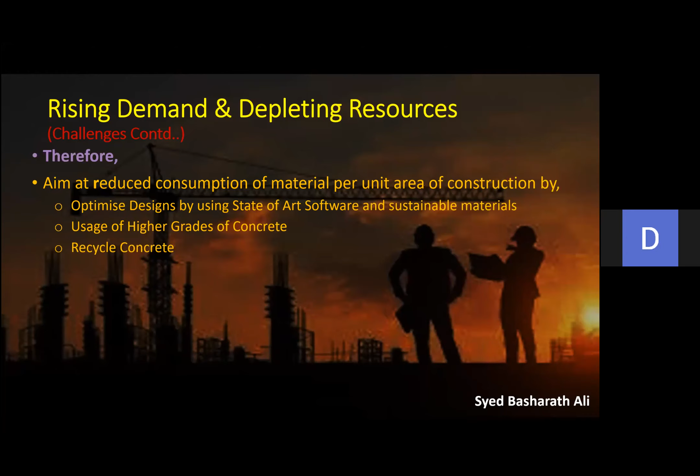Excuse me, sir. Hello? Sir, sorry to interrupt, sir. Actually, the slides are not changing, sir. Just to inform. Just hold on. Okay, I'm seeing them changing here. Just hold on. You can see me? Yes, sir. But the slides are not changing, sir. Okay, just hold on. Do you see now? Yes, sir. You see it now? Yes, sir. Yeah.

Yeah, we were discussing this. Aim at reduced consumption of material per unit area of construction. For that, the designs have to be optimized by using state-of-the-art software, good judgment and sustainable materials. Then usage of higher grades of concrete would result in lesser concrete, because as I said, from M15 we have moved to M30 now, minimum M25, M30, and I'm pretty sure very soon we'll see that even M25 and M30 will be obsolete.

Then the recycling of material, that's still not happening in India. We should, because we are seeing redevelopment happening. Old concrete buildings are being brought down, and old roads are being removed. Whenever we demolish any concrete, we tend to throw it away as debris. I think it's time that the government come up with a clear policy and enforce it, so that the concrete is recycled, the debris is sent to those plants, and they regenerate coarse and fine aggregates from that.

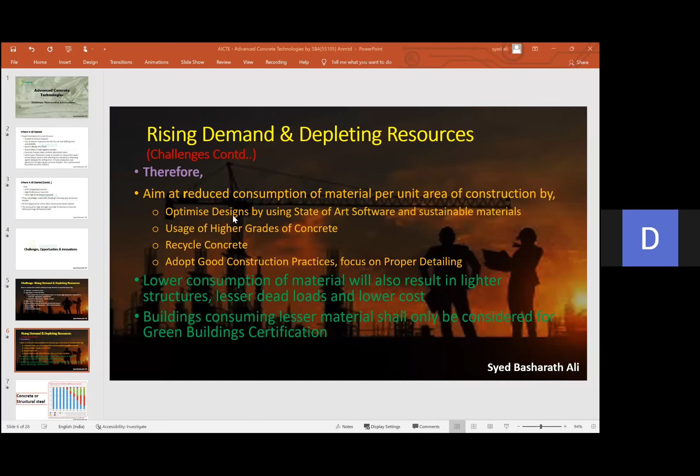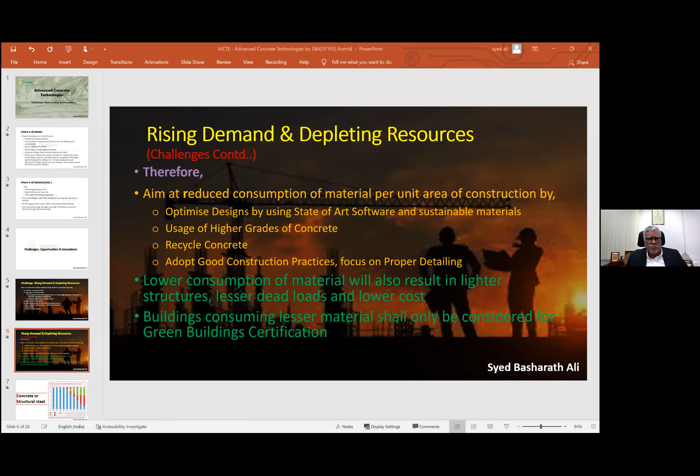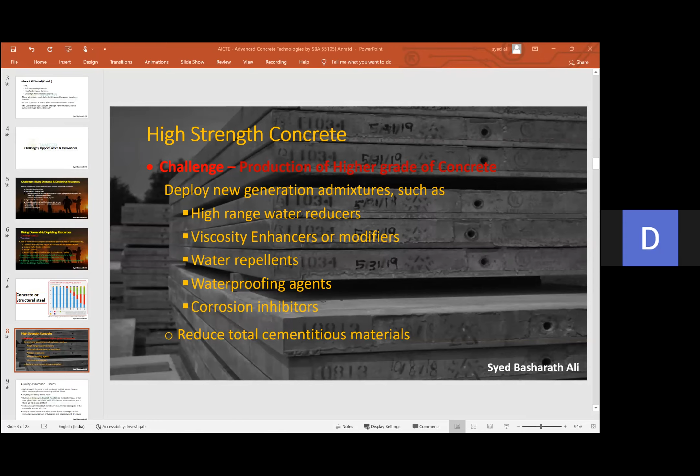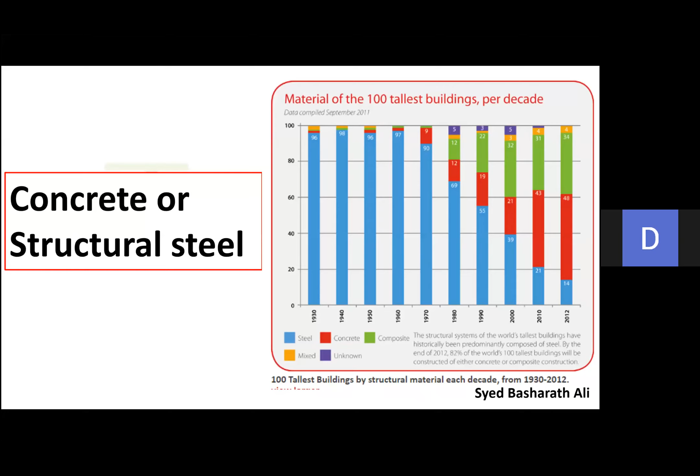You see this slide now? No, sir. Slide has not changed, sir. Again, some issue with the system. Sir will join shortly. Kindly wait. Is it okay now? Yes, sir. We are able to see the screen. Sir, can you move backward or forward? We will tell whether the slide is changing or not. Okay. Is it changing now? No, sir. It is at high strength concrete only. It's not changing again. Is it changing now? Yes, sir. Now it's changing, sir. Okay.

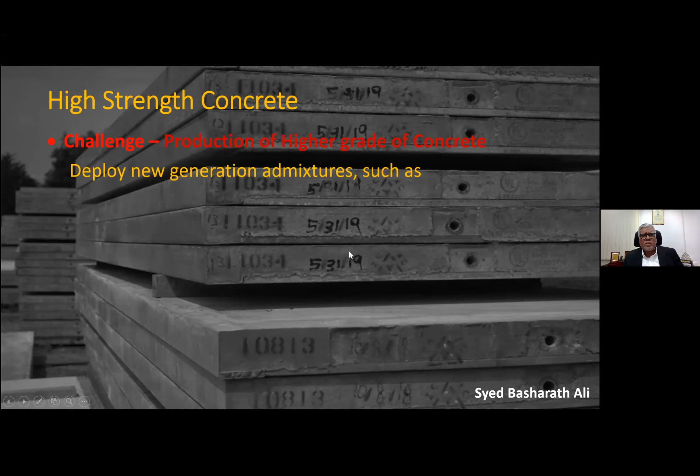So we'll discuss the challenge of production of high grade concrete. To do that, we started deploying new generation admixtures, such as high range water reducers, viscosity enhancers or modifiers, because the water cementitious ratio, we know, is the biggest factor in attaining higher strength.

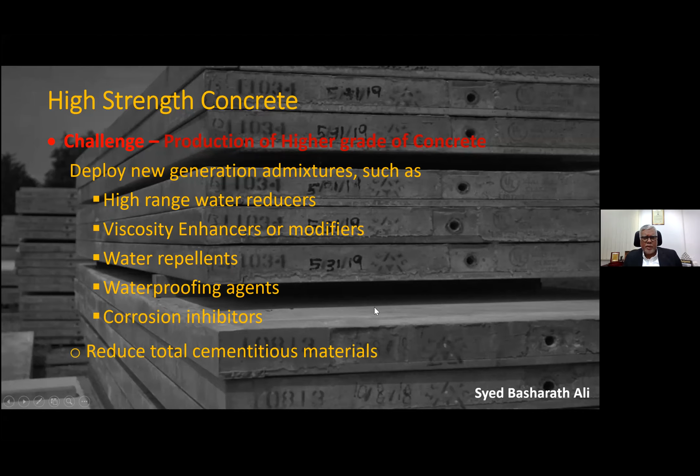Then viscosity enhancers to control the workability of concrete, then water repellents, waterproofing agents, and corrosion inhibitors. We started using these, which resulted in production of higher strength concrete. And we were able to do that even with reduced cementitious materials.

Is it changing now? Yes, sir. Yes, sir. Hello.

Now let's discuss the quality assurance issues which we are facing on a daily basis even now. I'm telling you this from the experience of not only me but most practitioners in the field. High strength concrete is only produced by RMC plants. However, there is no entry barrier on setting up RMC plants. Today, anybody can set up an RMC plant.

Everybody cannot start a diagnostic center. Everybody cannot start a medical shop. You need to be a pharmacist, or have a degree in pharmacy to start a medical shop, or a degree to start a diagnostic center. But anybody can go and start an RMC plant. Somebody who was just supplying sand, you hear that he started manufacturing concrete without any technical competence or capabilities. There are no controls as such.

So anybody can set up an RMC plant, however the RMCMA, that is the Ready Mix Concrete Manufacturers Association, is the only body which monitors the performance of the RMC plants of its members. They are fairly strict. That's why very few RMC vendors are their members, mostly the larger ones. The smaller ones still don't do that.

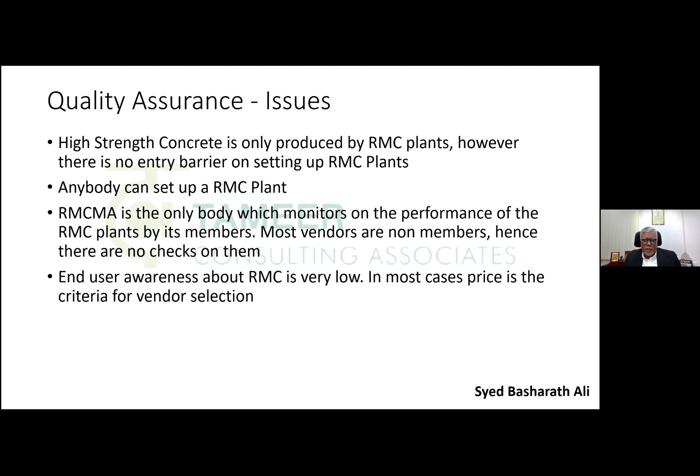End user awareness about RMC is also very low. The end user thinks that, as he buys any product from the market, concrete is the same thing. So in most cases, the price is the criteria. He will buy RMC from somebody who gives it very cheap, be it any grade of concrete, 25, 30, 35, 40, whatever it is. Even though there are designers who would specify, you can't be sure about the end user.

He would not look at the credibility of the vendor, and because they are attracted by the lower price offered by some of the vendors, they go and buy that. And nobody would do business by losing money. So they end up definitely cutting cement or whatever admixtures they were supposed to mix as per the design mix. That is one big challenge for which there is still no solution before us.

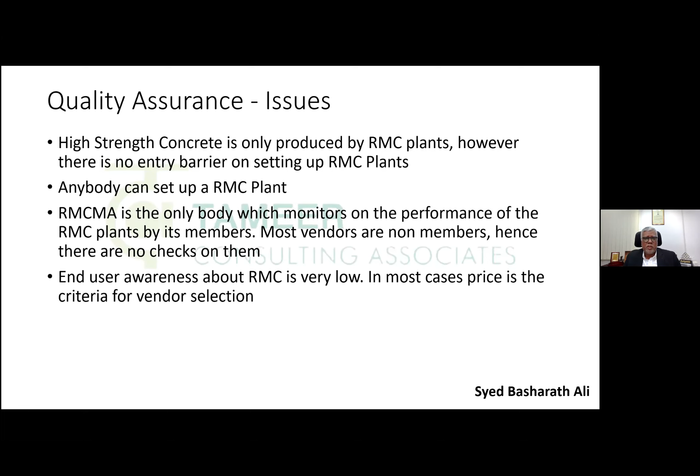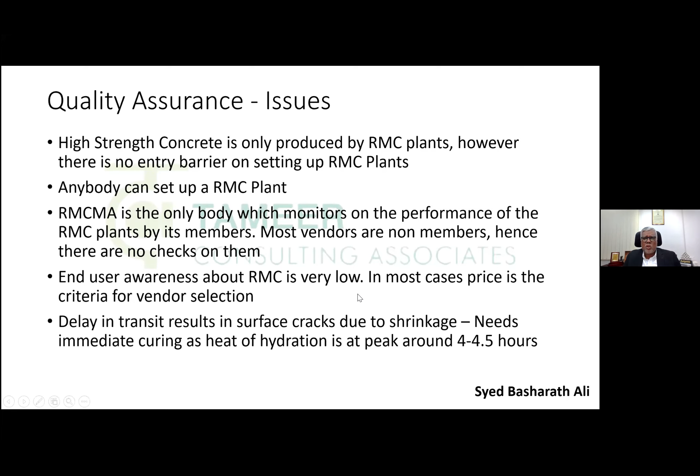And then, delay in transit results in surface cracks due to shrinkage. In many places we notice that concrete is placed beyond 4.5 hours after being charged into the transit mixer at the RMC plant. This concrete starts setting very soon, and if curing is not initiated immediately, you will see surface cracks on account of shrinkage, which have to be attended to immediately.

If they are not attended, then they would remain and then give a very gory picture of the whole concrete surface.

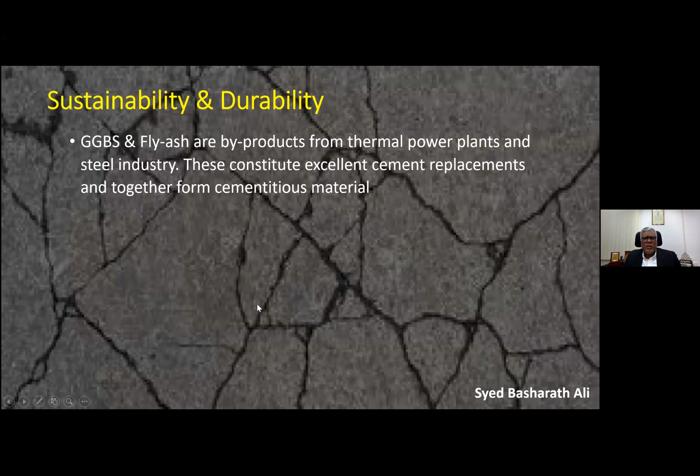The next comes the durability challenge before us. Now that has been basically solved by the fly ash and GGBS, which resulted in reduction of cement. These are from, as I said, thermal power plants and steel industry, and these constitute excellent cement replacements and together form a good cementitious material. Now the code allows up to 35% of cement to be replaced by GGBS and fly ash, which is the practice now, between 30 and 35%. That is being mixed everywhere, even for higher grades of concrete.

So if you notice, even though the cement percentage has gone down, cement consumption has gone down, the grade is going higher and higher. They also help reduce the heat of hydration, particularly in the initial periods, and thus improve durability properties of concrete substantially. And then, as I was mentioning about the delayed placement of concrete, 4.5 hours are extremely critical from the time of mixing. If that crosses, the concrete heat will be at the peak, which can harm the concrete.

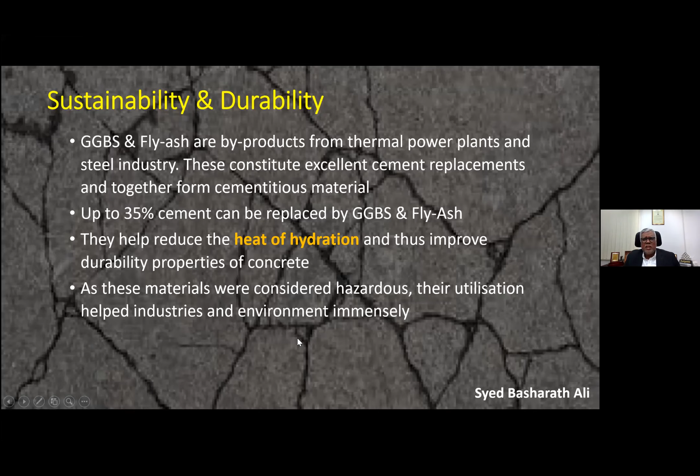And again, as I said, GGBS and fly ash were considered hazardous materials in the 1990s, because fly ash would fly everywhere whenever there's a strong wind blowing, and caused a nuisance to the surroundings and was hurting the environment. So it has turned out a boon to both the construction industry as well as the plants which were producing them.

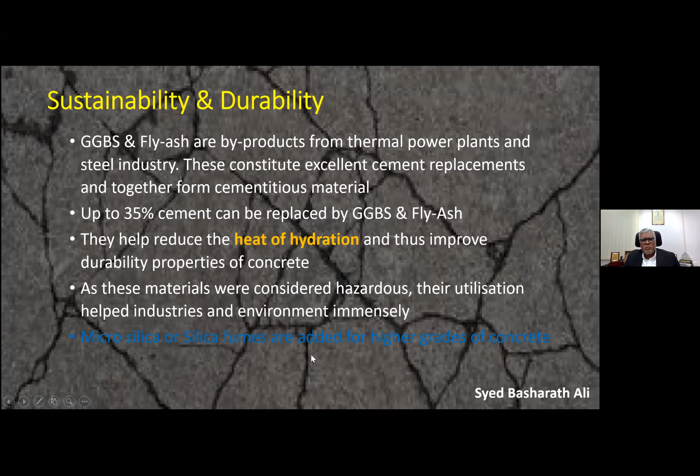Apart from that, microsilica or silica fumes are also added for higher grades of concrete beyond M40. For M50, M60, essentially they use it. Currently in India, we are mostly using M40 to M60, and probably for very tall buildings we're using M60 grade.

You want me to take a break here, Dr. Annapurna? If any questions are there or discussions? No, sir. Can you please carry on?

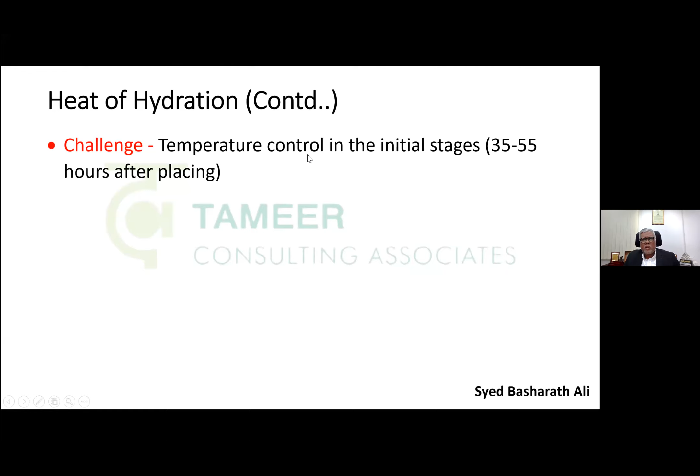Okay. Now, as I said, the temperature control in the initial stages, that is 35 to 55 hours after placing, is important. The low heat design and insulation to reduce the differential temperatures in mass concrete. This problem is very acute in mass concrete because the core temperatures will be very high. Either we have to have ways to measure the temperature at the core and also at the perimeter, otherwise we need to make sure that enough care is taken and the concrete is insulated.

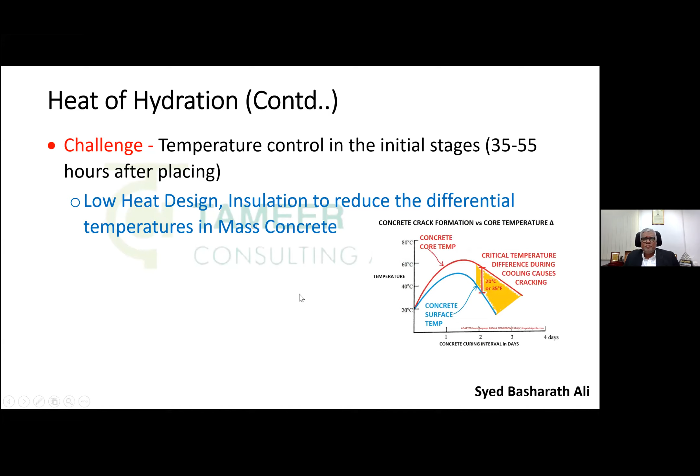Now, this graph shows the variation of temperature at the surface and in the core; it could be as high as 20 degrees centigrade or 35 degrees Fahrenheit. And then again, water penetration, water absorption is another challenge. Rapid chloride penetration tests are carried out to make sure that this is resolved. And the denser the concrete, the better compacted it is, the better it is.

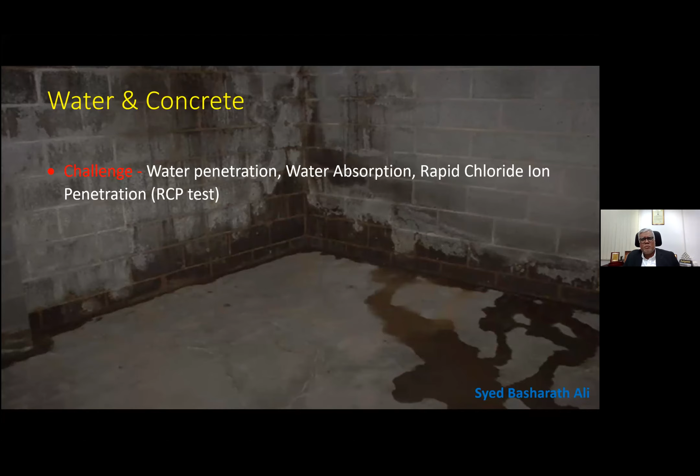Then this is another challenge. The ingredients don't come from the same reliable source which was used while the mix was designed. If one quarry is over, they get from another quarry, or the vendor has a tendency to buy from cheaper sources. So there is a chance that the fine and coarse aggregate properties might vary when the source is changed, and that might have an impact on the mix design. But once a design is arrived at a project site, normally they don't change it, even if the raw materials are changed. So that is another challenge.

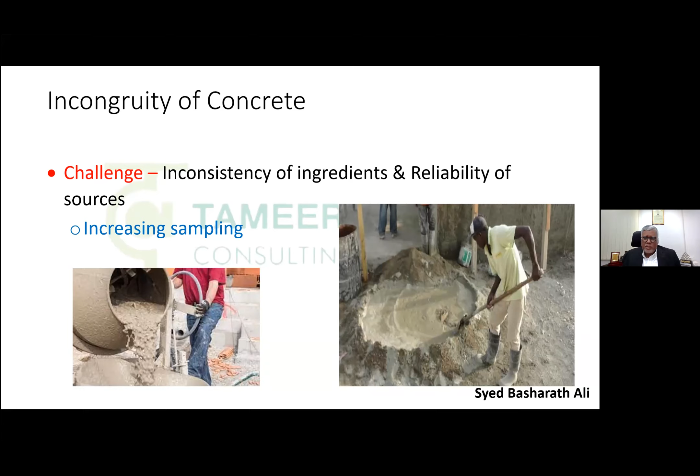For that, the best thing to do is increase the sampling, so that we know that the desired concrete is being received at the site. Then maintaining consistency over a longer duration, in case of delays. That's another challenge. For that, pumpability and compaction are of prime importance. Usage of retarders also is very helpful there.

The other problem which we face at the sites is generally segregation and improper compaction. These problems compound when higher grade concretes are there, because there's not much margin left for safety. So it's important that the quality of concrete is maintained. Self-compacting concrete is rampant now, it's available practically everywhere. Because depending on the labor at the site to do vibration or compaction is very difficult. You will not get uniform compaction, and over vibrating was very common. So self-compacting concrete has solved this issue to a very large extent.

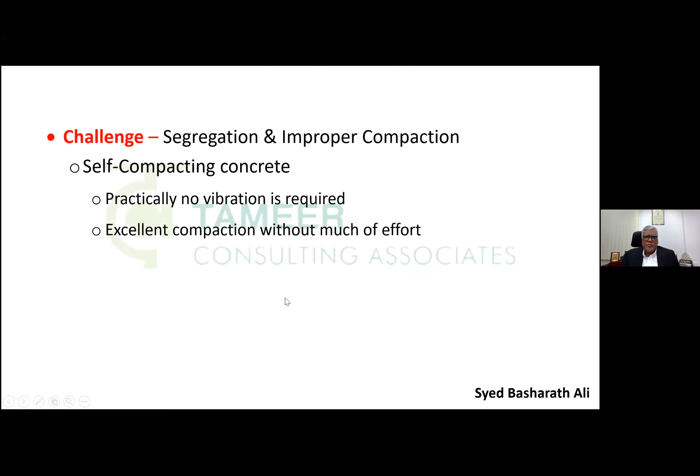In fact, at most of the important locations, only self-compacting concrete is used, and you get excellent compaction without much effort. And now we notice in the past few years, the structural elements are getting thinner and thinner, even in tall buildings. The architects are keen to use columns and beams no more than 200 mm wide.

The code gives a much higher cover, and with 200 mm wide elements, both column and beam, it's not possible to design the buildings with that. But the architects are very keen. So that's why we are moving towards not only SCC, but also the columns are being replaced by walls, where the code requirements are much lower for the cover.

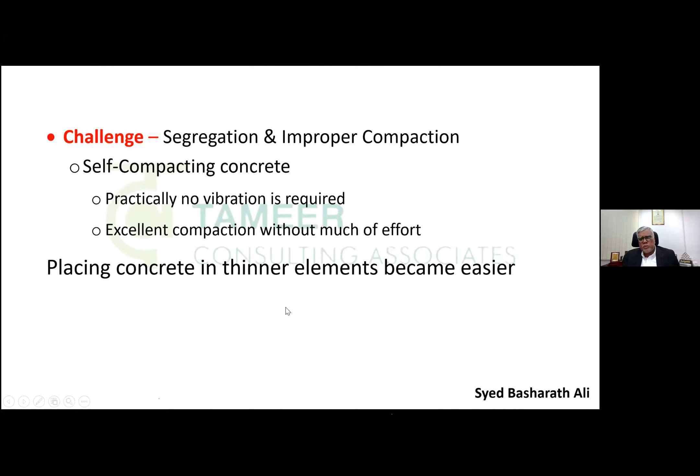Now this throws a lot of opportunities to us. The availability of higher grades of concrete made it possible to build tall buildings. Tall buildings were not feasible when we were in those M15, M20 days of concrete. Even with M25, tall buildings were not feasible. The higher strength concrete and the higher grades have made it possible.

Then multi-story thin shear wall residential buildings. This has become very common in India. Most of the projects are aiming at that. Now, there are various reasons for doing it. One is the red brick, which was very common in earlier days, is not as available anymore, because red brick manufacturers have made most of the agricultural tracts of land barren. They have taken out the topsoil, used it for brick, and then that land became useless after that. So agriculture stopped allowing them to use that.

And moreover, the taller buildings use lighter material. You know that the red brick density is very high, about 19.5 kilonewton per meter cube. So people moved towards lighter walls, and that's where AAC came into play. And even with AAC block, you need laborers, masons to come and build the wall and do the plastering, which is very difficult. And skilled labor is no more available because the mason's son is not becoming a mason. The carpenter's son is not becoming a carpenter. So you are practically working with semi-skilled laborers.

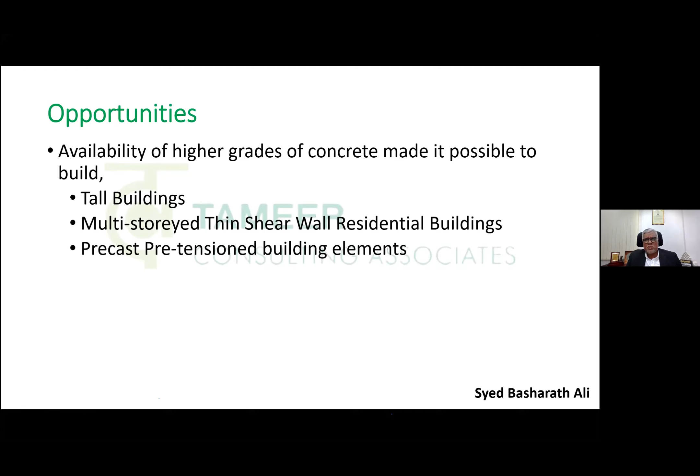Then off-site construction came into play. Then precast, pre-tensioned building elements. These are done only in the factories, at the works. And then you need a higher grade of concrete. They use M40 and above. It's not possible to do these precast, pre-tensioned elements without using high-grade concrete. So this is also an excellent opportunity.

And you see in Hyderabad, for the last 15 years, post-tensioned floors have become very common. More and more end users, developers, or even IT buildings want flat slab buildings, flat plates. They don't want beams because they come in the way of service zones, that's electrical and air conditioning. So they want long spans, columns far apart, 12 meters apart in both directions. And without post-tensioning, it's not possible. And post-tensioning requires minimum M35 grade concrete. So that would not have been possible had high-strength concrete not been there.

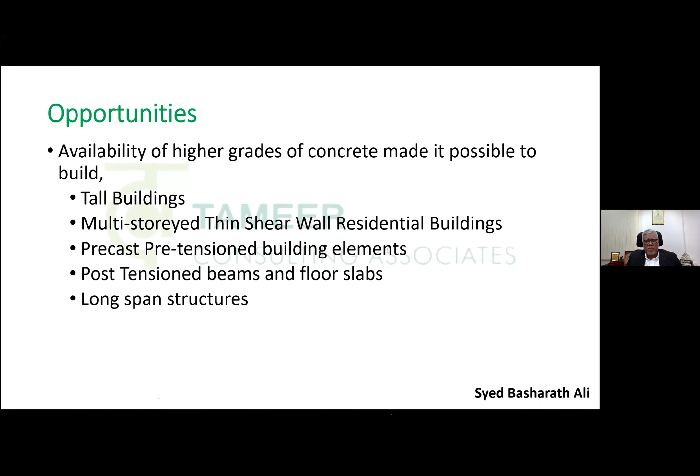And for long span structures too, whether we use post-tensioning or not, high strength concrete is a must there. And even for concrete composite construction, same story. So these structures help in economizing the structural cost when reinforcing steel prices shoot up.

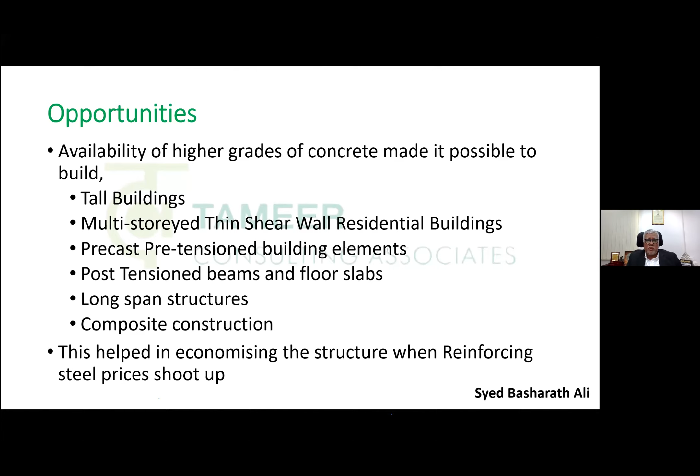Now, one very interesting thing I would like to share with you: the cement and steel cost, and even the aggregates and manpower, fluctuate a lot. Some days more steel in a building gives you an economical solution. At other times, less steel and more concrete gives you a better solution. We were doing an exercise last week only. Now steel has become so exorbitantly expensive. Concrete did not go up as much. So less steel with a little increase in concrete will give you a better solution. So the tendency is to use as low a quantity of steel as possible, but again have tight control over the concrete, because you should not end up increasing the dead loads.

Then the IT boom led to demand for office spaces with large spaces. This increased employment resulted in demand for housing. Overall economic development required massive investments in infrastructure. So most of the roads in the city, you are noticing, are cement roads, no more asphalt or bitumen roads now. That's why the demand for concrete is going up by the day. And this is an increased demand for technical manpower in the field of production and uses of concrete.

This is good news for us, because our graduates and diploma holders who come out of college have huge potential now to get a job and better placements. But the only thing which I would like to share here is that we should also look at giving them some kind of training at the institution level itself before they come out of college.

I think we don't have many concrete experts available now. The boys who come out of colleges are good in all aspects, but when you need somebody specifically to handle the quality assurance of a concrete site, they are not available. So I think that we need to really look at what we can do in that direction. Then we are noticing this.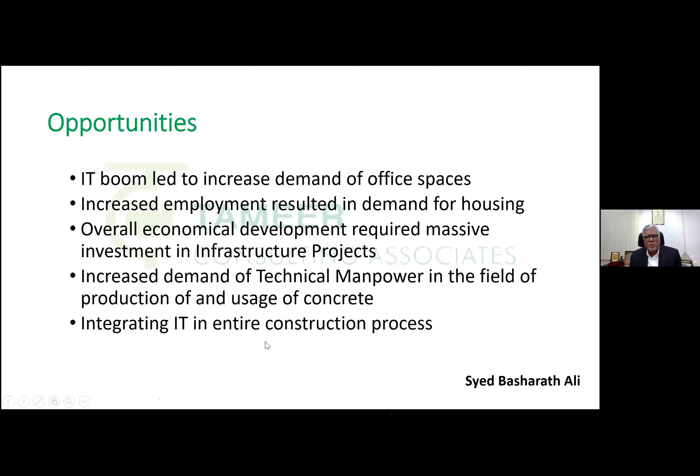Now IT is being integrated in the construction process in a big way. There's a huge time lag in India even now between innovation and implementation in the field, though this is reducing. And then close coordination between research, academia and industry is required. Sadly, that's not so. I would love if that can be discussed, even for a few minutes, in our group today. How do we bridge this gap?

How do we make sure, like in medical college, I always give this example. The medicos spend a good amount of time in the hospital before they get their degree. But we don't see that happening in civil engineering. I think it's high time we think about that. Therefore, field exposure while in college is extremely important. And then they would really see what they are studying. They will see the relevance of it, and they'll get back to college and discuss with their professors.

Then, this we discussed: admixtures, new construction techniques, and offsite constructions also we discussed. Now, BIM is another area where there's huge job potential for our youngsters, and I'm sure soon, even at graduate level, this should be included as part of the curriculum or an elective. And then project management techniques.

Now, there is one very strange thing I noticed. Every civil engineering graduate wants to be a structural engineer. And then I tell them the project manager makes at least 3-4 times more than a structural engineer. They get more salary and perks, and he has better chances. And for each structural engineer, probably you will have 100 engineers working in the field who draw more than them. So exposure to project management techniques would be quite helpful to them.

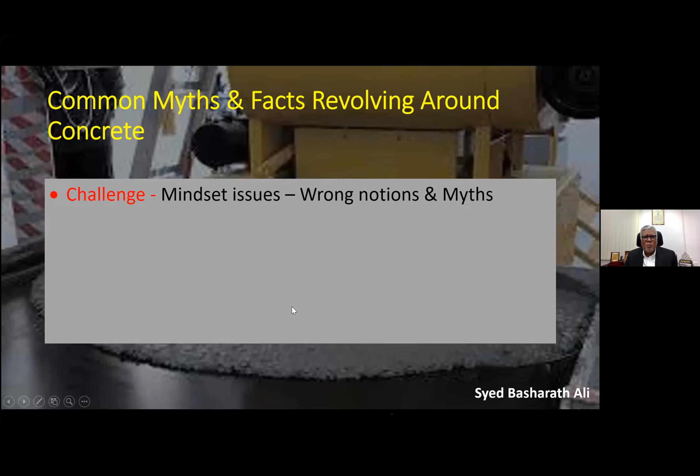So the common myths are, we are all aware of the wrong notion that more cement, better the concrete. In fact, less cement, better the concrete. Use water to improve workability. We are not doing that now. We are using admixtures, and this mindset requires a change.

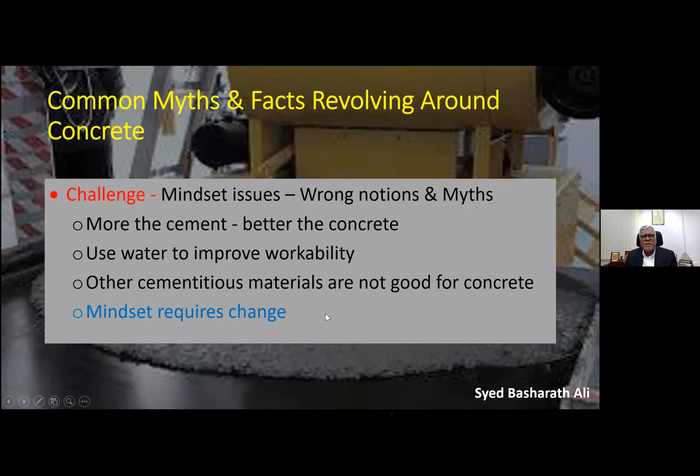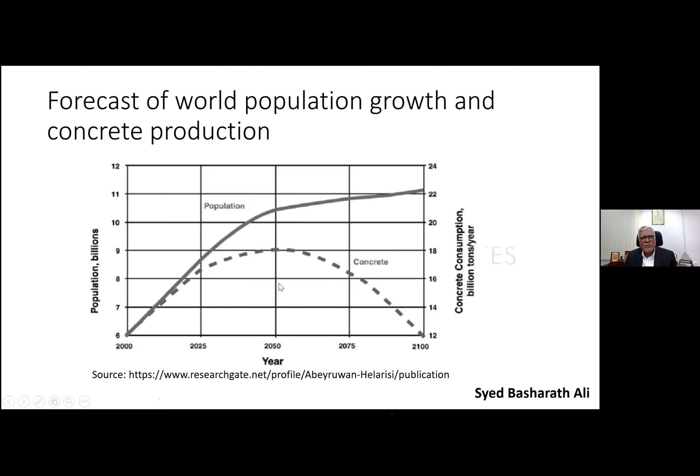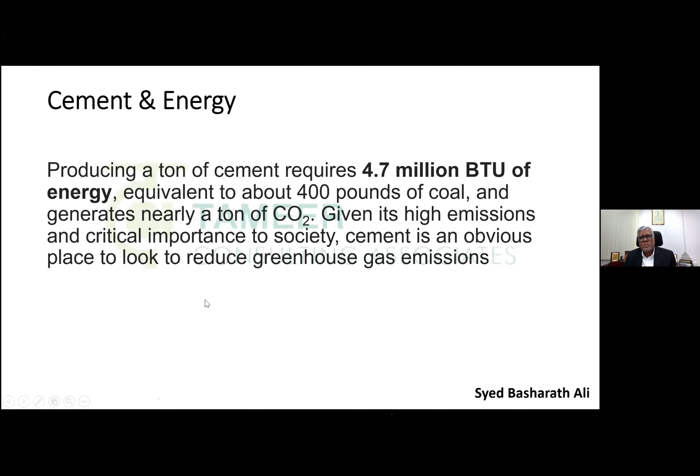Now, this is the forecast. This projected that after 2050, the concrete consumption will go down and newer materials would come, though the population will increase. So I think we still have a lot of time, so we need not worry right now. And now, finally, I come towards the environment aspect of that. A lot of energy is required to produce cement, and energy is one big load on the environment. So lesser the cement, we save on energy as well as we save the environment.

I was looking at one article recently. They said about 14 billion cubic meters of concrete is produced every year all over the world. Now, most of the cement manufacturers have come together and decided that they would reduce the carbon footprint by at least 25% by the year 2030, and you can see that between now and 2030 it believes this will prevent almost 5 billion tons of carbon from entering the atmosphere. So everybody is looking at us to reduce the cement content so the environment is saved.

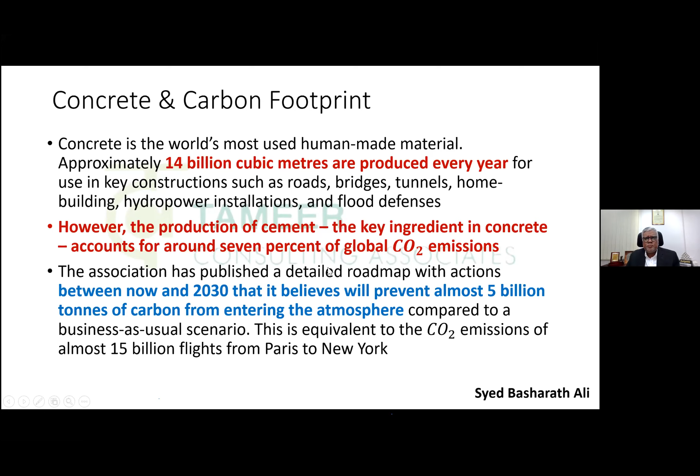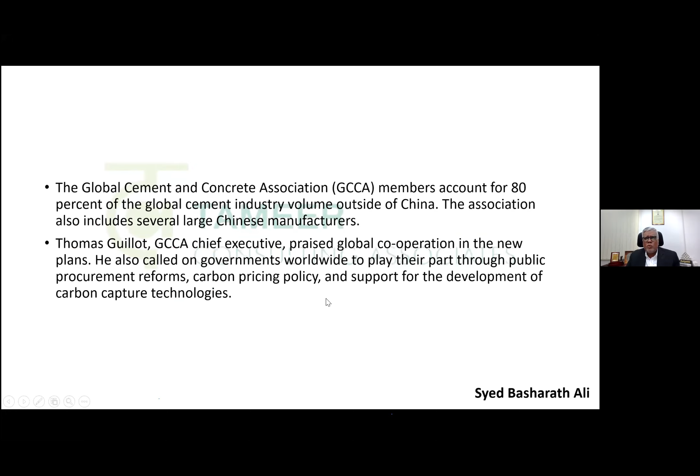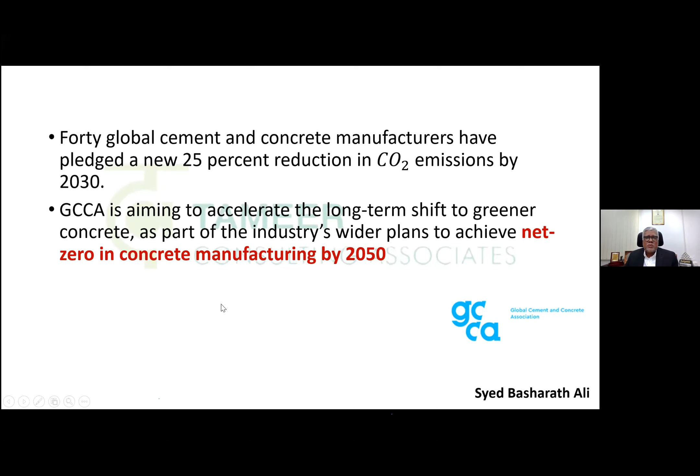This is what the Global Cement and Concrete Association members account for, 80%. And this is what they have vowed, that they will reduce the carbon footprint. Yeah, 40 global cement and concrete manufacturers have pledged a new 25% reduction in CO2 emissions by 2030. So let's all help them by reducing the cement consumption. And they want to make it net zero by the year 2050. So I wish they do it, because they say concrete is the most used man-made material. So that is playing havoc with the environment.

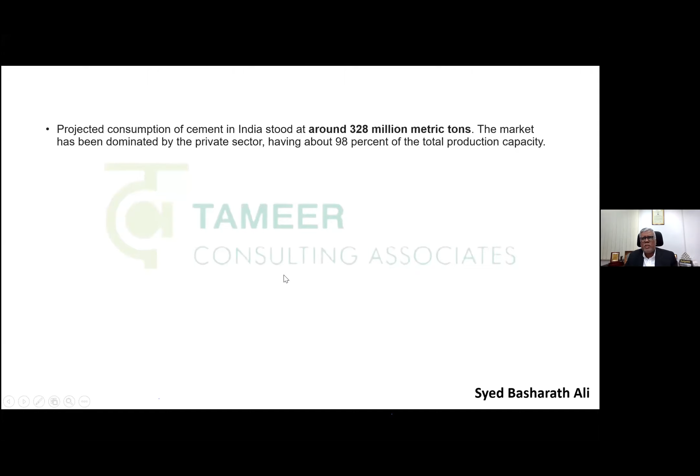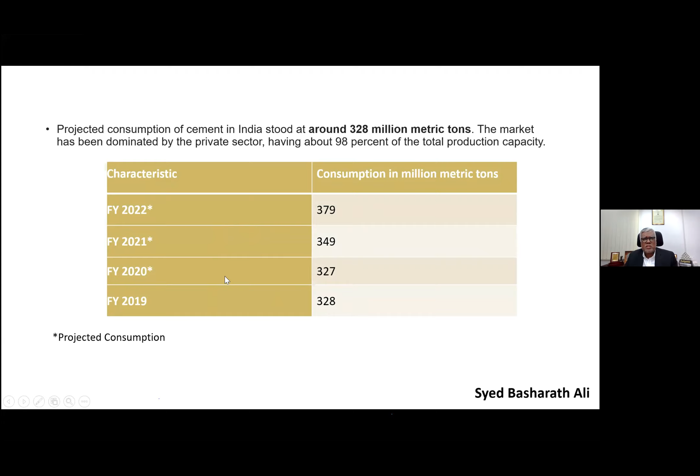So now in India, about 328 million metric tons of cement is used. This would go up, so we have to look at how we reduce it. Now these are the projections for the cement consumption in the next 4 years, 2019 to 2022. So now again, finally to close.

Now, the focus today is on doing effective project management, how to handle the material very efficiently, and then work on BIM, artificial intelligence, ultra high performance cements, self-healing concrete, graphic concrete. I'm not going into all that because I think I have already taken enough time. And then they want to monitor the concrete and other activities using drones. And offsite construction is likely to come in a big way to save us from the issues which we encounter.